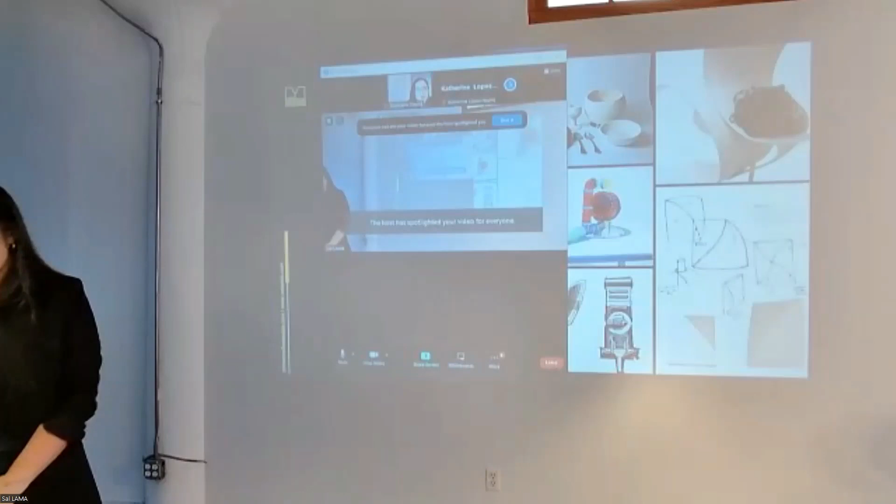Yeah. Oh, it's not? Yes, that's perfect. Okay, yeah, thank you, sorry. No worries, no worries. Bye.

Okay, all right, I'll just click. All right, yeah. So after school, I worked at Converse for a little bit.

I was designing accessories, it was a 2-person team. I started out as an intern, made my way to a full-time position. But I had this itch—I felt like design was supposed to be more.

So I ended up working for Interwoven Design Group, a wearable tech design firm run by an old professor of mine named Rebeccah Pailes-Friedman. But even then I still had this energy—I felt I needed to do something more. I got bored after 6 months; I get bored very easily. It was nothing against Interwoven, I just felt like I needed to do something else.

So I left, gave my 2 weeks' notice, and started taking on different freelance projects. I put a profile on Upwork and some other freelance sites, and basically started taking whatever jobs came our way, for portfolio and, you know, the money.

At some point, Manny did have a full-time job, but he had some flexibility in his schedule. So we decided to join forces, call ourselves Tangent Design, and be on our way to start building a design firm. One year into that, we were 3D printing a lot for clients.

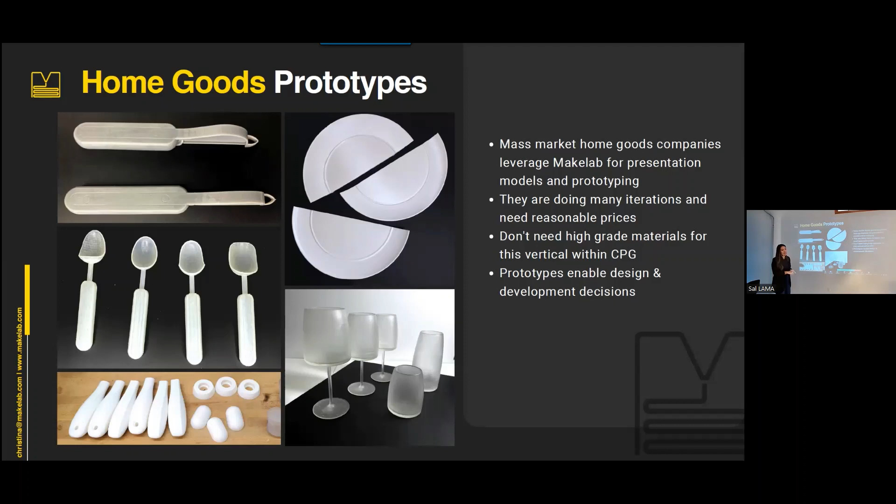What we found is us being able to reliably turn around quality parts in the materials they choose pretty quickly enables them to design faster, so they can kind of parallel projects—they can work on the glasses and something else and the plates all at the same time, because we're taking care of a lot of the heavy lifting with the prototyping.

Another example is packaging. This one honestly took us for a surprise, but it's something that's pretty recurring. Have you guys ever been familiar with paper pulp packaging-ish?

There are quite a few companies that are constantly prototyping and selling their solutions to clients. Part of that sale is that they print with us and we ship them the prototype, sometimes in multiple quantities, so they can try it out in a client meeting and sell the client on the solution without committing to a mold, without committing to all these expenses.

This is really interesting because we do higher quantities for this, but we've also noticed that we print for the same company, and the file names change. So we saw that a lot of these solutions were for Pfizer, Flonase, Whoop—the fitness tracker band with no screen—Billie, Shiseido, and it's just very cool for us to see.

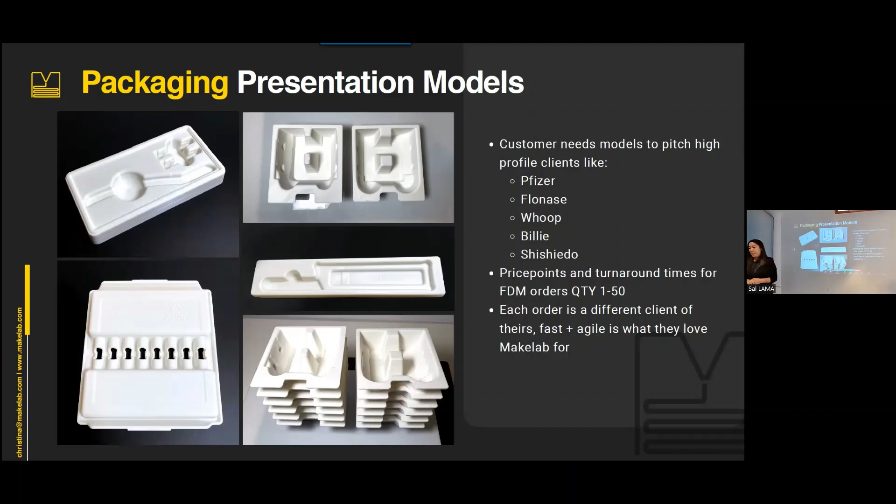And again, they like us for being fast and agile. The last bit is probably the most fun use case, but also the most hectic. Anyone who's been in the fabrication industry, making things for holiday displays or a marketing campaign or a shoot, knows that the creative producers working on that project need everything literally yesterday, and will bring that energy to you. But honestly, it's kind of the most fun projects because it's the most recognizable and you get to see your work out in the world.

So this is an example of this Macy's window that went up last year in 2022, during all the holiday windows. We were printing legitimately squirrels and reindeers and Santa Claus, and a lot more. This was a very, very large project. But what was cool was we printed some of these in parts, and the fabrication studio called Square, they're the ones that finished it, put it together, felted it, and made it perfect for the window.

And for me personally, I grew up in New Jersey, and so when I was younger, I would come to the city every winter season, every holiday season, and my mom would kind of force me to walk a lot to just look at the windows. So it's very full circle for me that we did this project.

And yeah, I didn't want to take up too much time. We don't have that much time, so that's... Oh wait, one last thing.

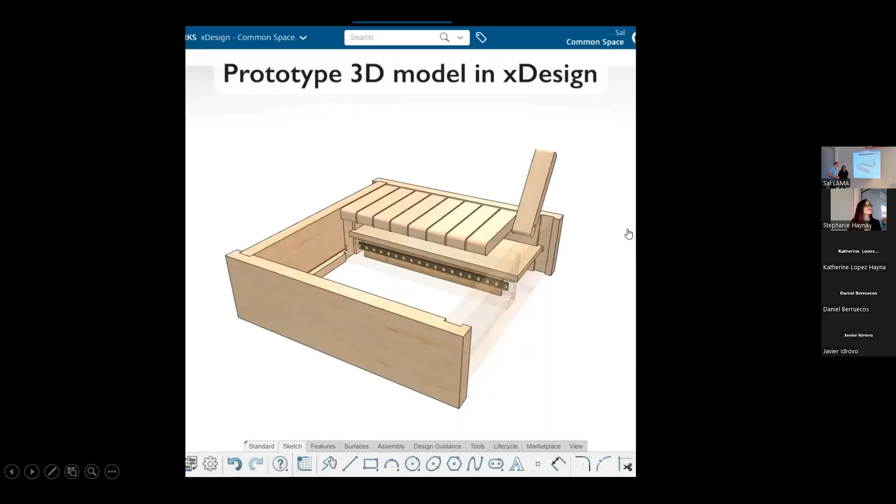That just happened. Yeah, so we've recently - did we miss a slide? Anyway, no, this is it. Okay, we recently started a journey into content creation. Oh, sorry, it's so complicated, come on.

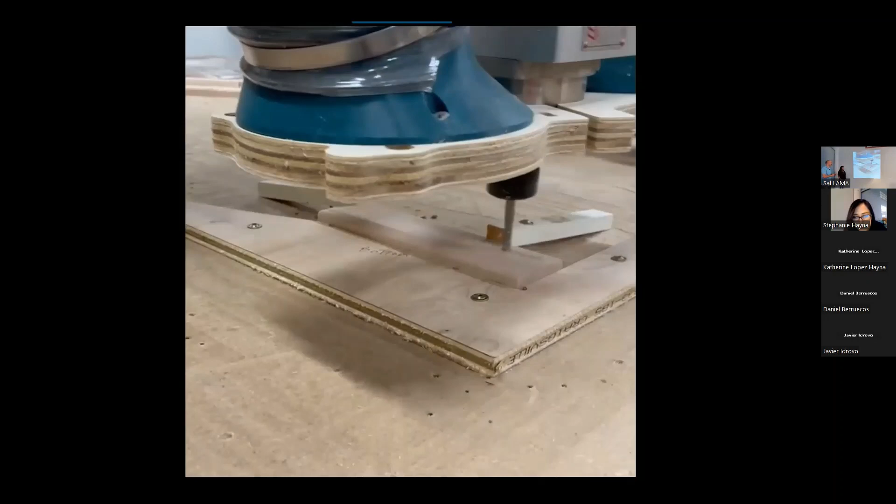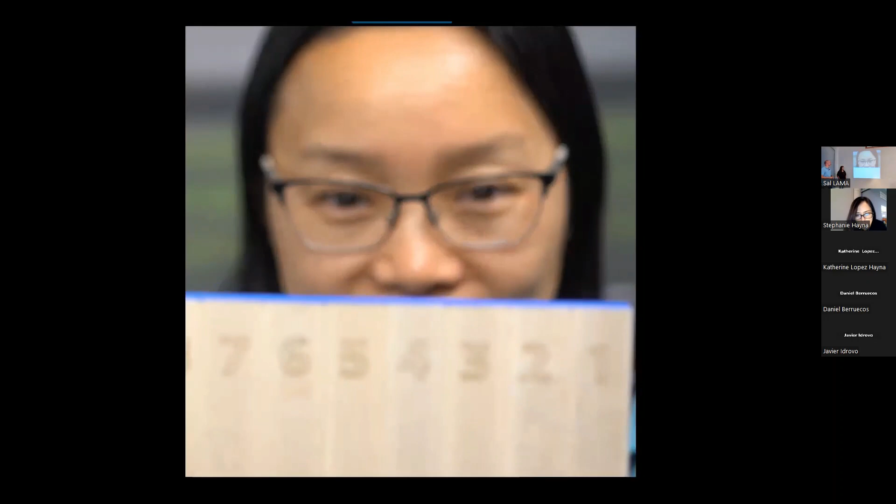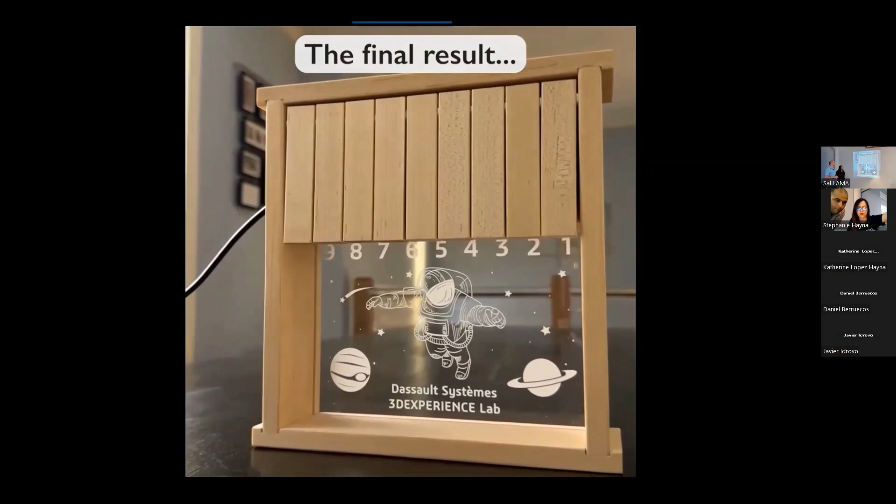We've been avid makers since we could hold a pencil, so it almost seemed natural to actually use the CAD that we design and the skills that we have in our creativity to actually make things. So we started a YouTube channel called OurNextMake, and we build all kinds of projects. This is just an example of something that we built recently - it's actually a Shut the Box game. Has anyone ever played Shut the Box? You need to go get one. It's not going to be as cool as this one though, because it won't have LEDs and laser etched acrylic, but it's a really fun game. You roll the dice, and eventually your goal is to shut the box with all the numbers that are lit up. But again, this is just one example of the type of stuff that we do on our channel.

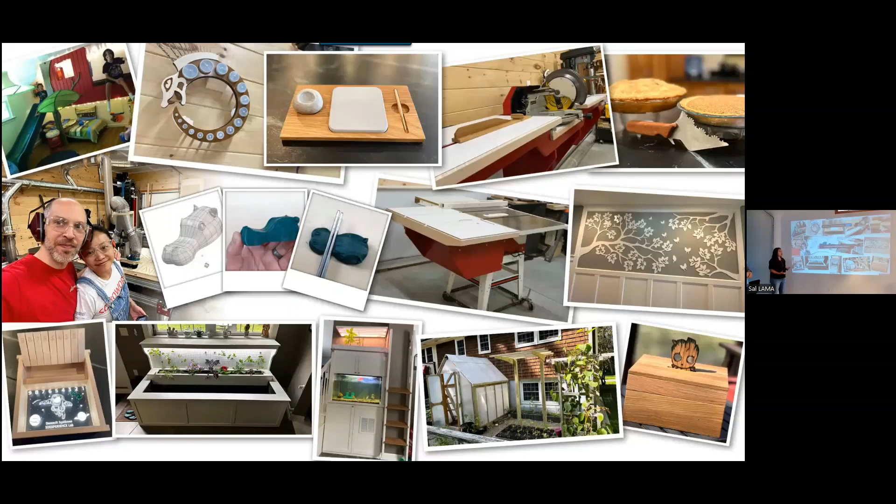We do a lot of different things. The idea is we want to use our software to eat our own dog food, or drink our own champagne, however you want to say it. But in doing so, we found that we could do a lot of stuff like woodworking, 3D printing.

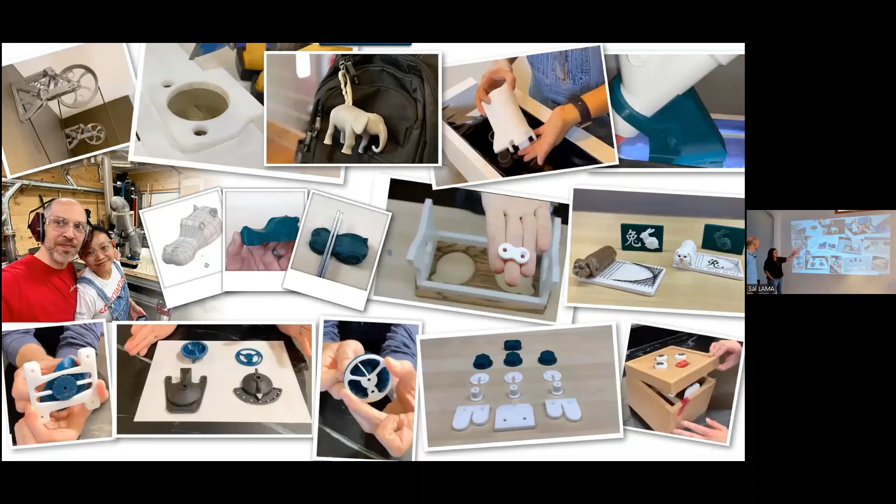You'll hear a bit about things that we've learned. We have not touched everything that you guys have, so we would love to have a conversation. Our projects, some of them have nothing to do with 3D printing.

Some of them are all about it, and most have some element where something needs to be 3D printed. So we want to talk to you about that today. Our goal is to share what we've learned about making something that's going to be 3D printed, and also to learn from all of you, since I'm sure there's expertise in the room we can share amongst ourselves. We want this to be a dialogue as we go through.

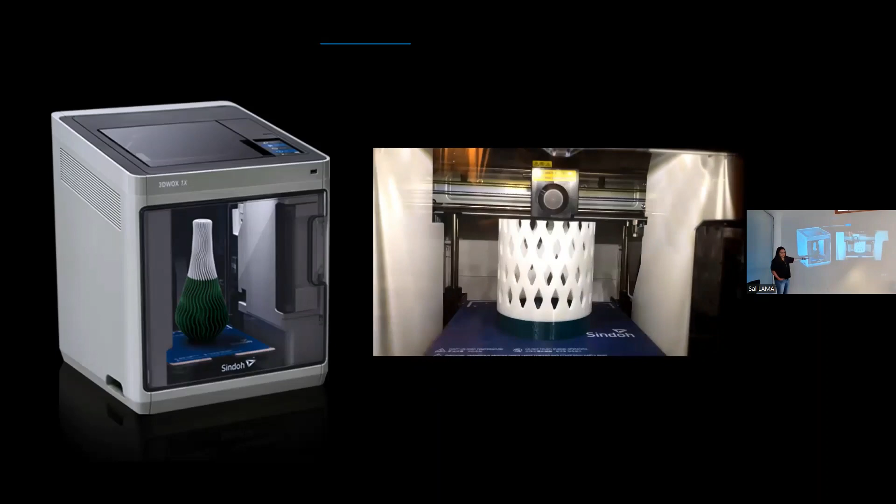One caveat I want to set is on all of these projects we've done, we've strictly been using one particular printer that we have quick access to. We have 2 Sindohs at our house, conveniently, that we can access. So we're using PLA in working with what we do. Understand that when we start telling about the learnings that we have, I'm sure there are solutions in other methods, but that's kind of what I think this conversation is about.

A lot of our stuff is FDM based. If you're doing SLA printing or some other powder or metal printing, that's not within our wheelhouse. But if that's expertise you want to share with the group, we'd love to hear that too.

I think a common question when you start thinking about a part on the screen, you've modeled it in whatever CAD software you use, and you ask yourself, how am I going to print this? There's criteria we try and address: am I trying to design this to be really strong, or do I care about the surface finish? Do I want to minimize how much material I'm using, or do I want to make it easy after it comes off the print bed to have a finished result? And maybe I just needed it really fast. So what are the things I can do to hit one or maybe all of these?

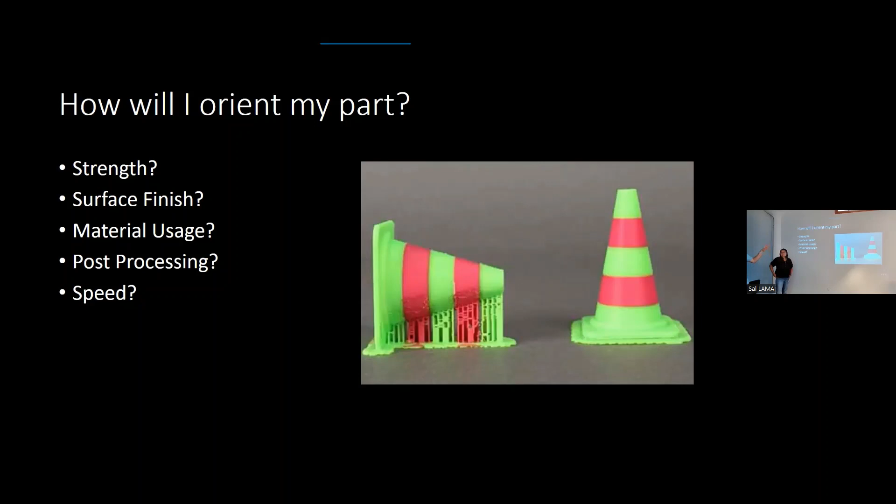Where are the trade-offs? I think the good news is that 3D printed parts can be very strong. For people online, I'll pass this around - this is an example, I'm not going to tell you what it is. I'll ask everyone online to start putting in your comments, and as I pass this around, you can start feeling it. I will say I haven't processed the back, there's a couple sharp little bits, so be careful as you handle it. But again, 3D printing can produce really strong parts, and that's a part that has to be strong.

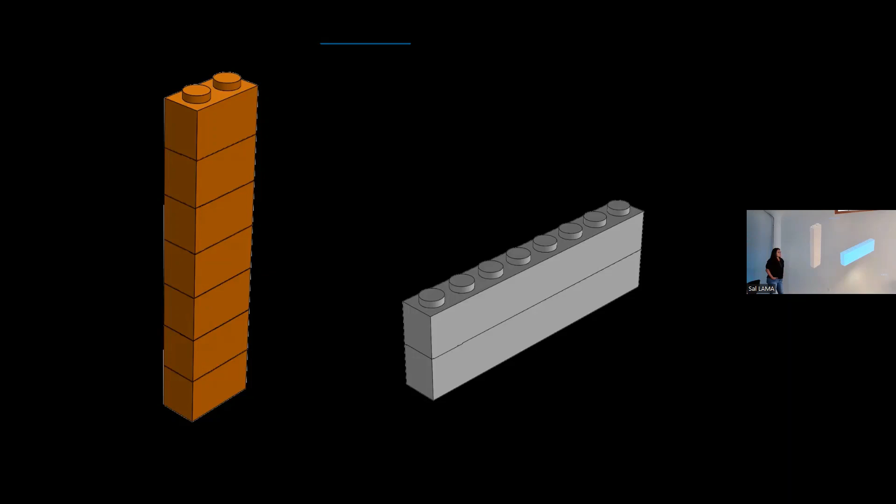I love this example. In FDM, you're laying down a layer of material at a time, and the orientation of your model will dictate its strength in many ways. If you stacked a bunch of Legos up like that, or built the same rough volume with Legos like that, there's going to be different strength characteristics, especially if in the end they're going to be a diving board. If it's held on one end and pushed on the other, clearly the one that's got all the layers going this way is going to break much more easily than the one where the layers are going this way.

So thinking about how your part's going to be used and knowing how the layers are going to stack up can also impact the strength.

Now, this is another example. We built a game. Surely people have played Ring the Hook or Hook the Ring. It's a drinking game, but it's a simple game. There's a hook, a ring on the end of a rope, and you have to try and hook it onto a...

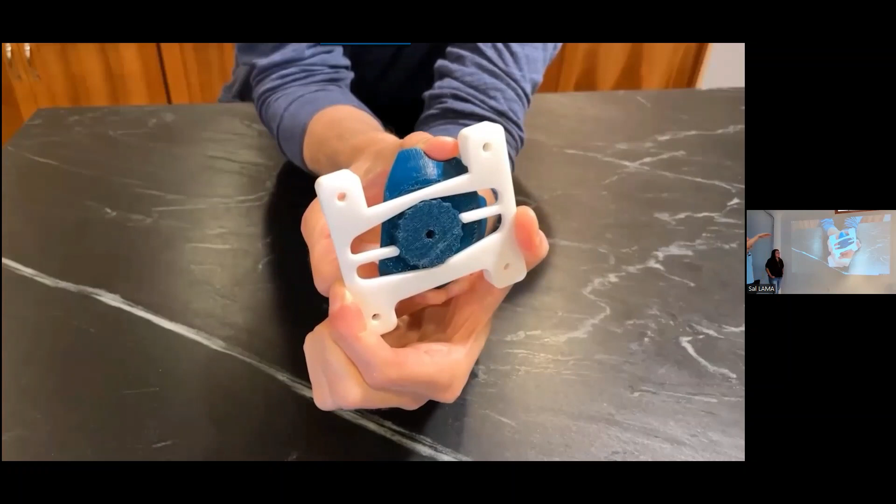Oh, and there's a little mechanism that I tried to design to hold the beam up. I wanted to have this sort of rotating mechanism where I could ratchet it into place, and that would hold the model. Then when I needed to get it out of the way, I'd turn it and it would let the arm down.

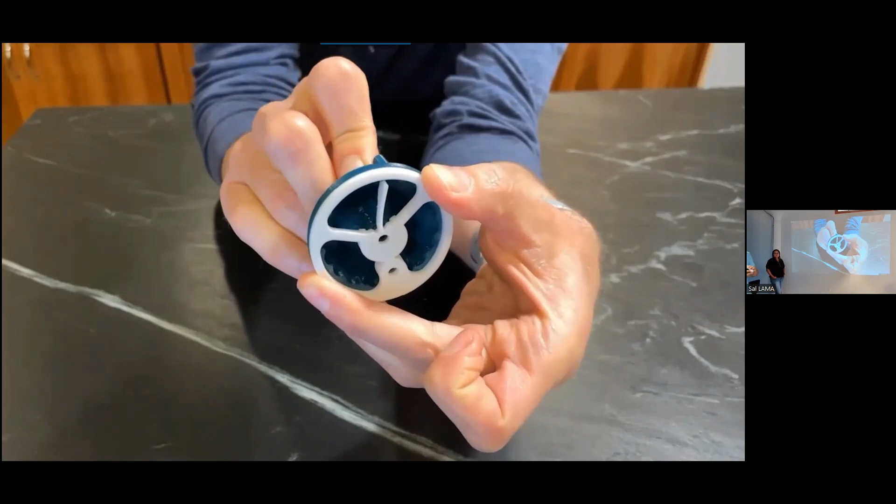I realized that I designed it way too strong. In fact, here's another sample. For those of you in the room, sorry for the folks online, this is going to be really hard to turn. But you can play with that and see just how hard it was to actually turn.

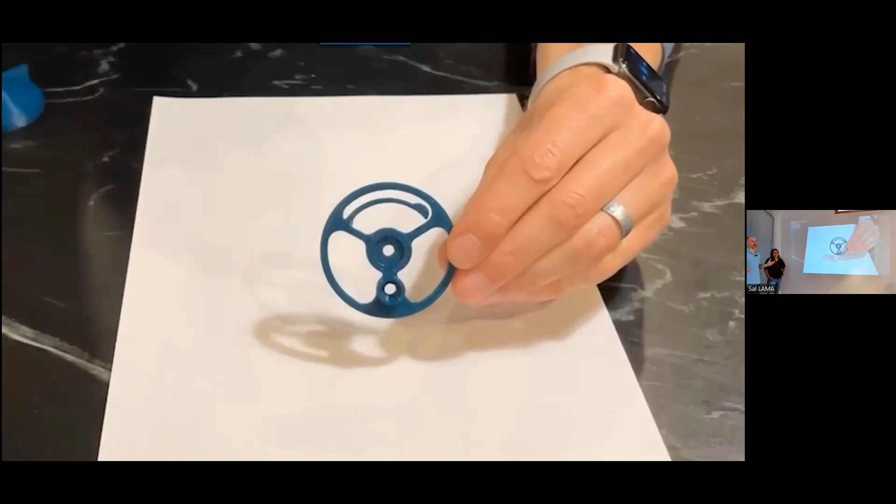So you can certainly design things that are 3D printed that are over-designed. But I went back to the drawing board and I started to modify the design and exploit some of the properties.

The very first one that you just saw in the video was actually where—let me back up, because this is right here. So I brought all of the ratcheting mechanism inbound instead of these big fingers on the outside. And I figured, okay, I could just have one finger that goes click, click, click.

But in this case, it was too fragile, and after just a couple of twists, it broke. So I under-designed it. Again, I figured a nice long beam would be fine, but the material was too stiff and it caused all the force to be way down there at the joint. It didn't have that flexing.

So I went back to sort of the drawing board, if you will, and made this design where it came off at an angle, because now it's just deflecting ever so slightly. And now I've got a part that actually works.

That's one that we can pass around as well. In fact, I took it one step further, because only having one of them created sort of this asymmetric feel. It felt one way when you turn clockwise and a different way when you turn counterclockwise, because of the compression and the tension. So I did this two-finger design and created a much more balanced feel.

But again, you can create very cool functional parts with 3D printing, and they can absolutely be strong.

So where is that weird part that I sent around? Is it still making its way around? Okay, I won't rush it. Chinloo, you got one other example here, right?

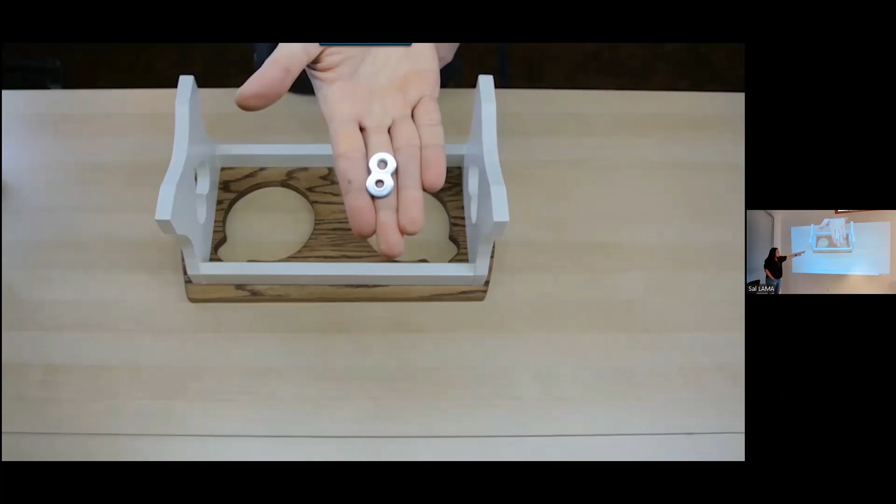Yeah, so here's an example where we utilize 3D printing to do a very simple function, which is attach the surface of this dog food station onto the base. Traditionally, you have these little number-8-shaped clips that you can screw one end to the base and then one end to the underside of the table.

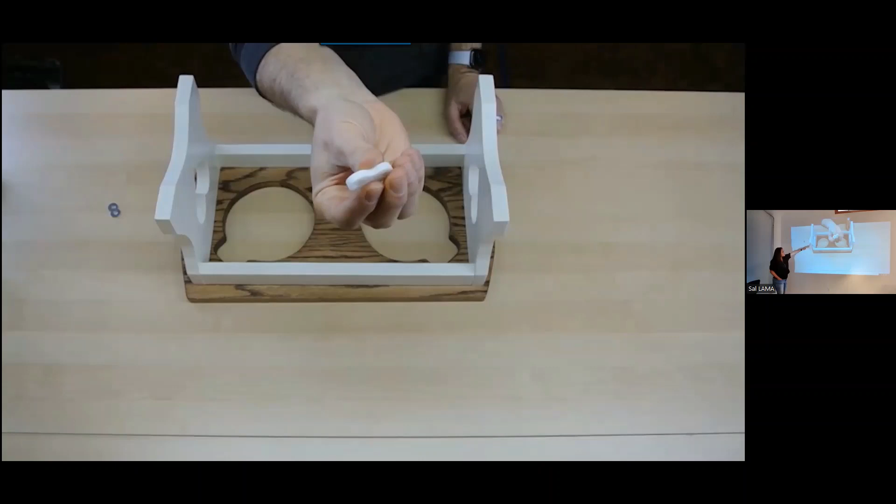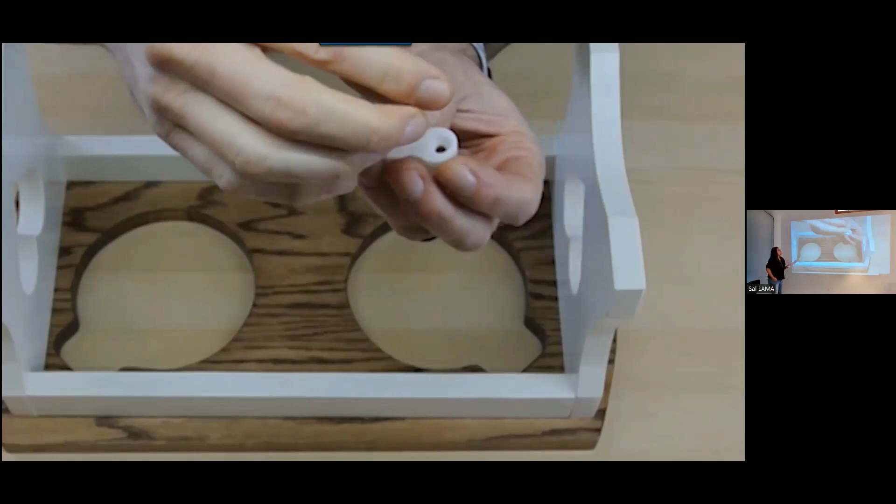But that's kind of overkill for something like this. So what we designed was this little version that is 3D printed, and it gave us the opportunity to countersink and create that kind of finish that we wanted. Here you can see Sal showing that you can flip it, and it's designed so that now you can install it hidden into the hole part of the dog tray. So it's that customizability that really helps, and it's strong enough with the 3D print.

Yeah, and that's an important part—there's strong and strong enough, right? It doesn't have to support like a 200-pound dining room table, whereas the metal clips might be used for something like that. But of course, for a dog food station, just a very simple 3D printed plastic part can do the job.

So that's a bit about strength. Where is that part? Did it come back? Who's got the guesses? Did the people online? Oh, Manny's got a guess. Manny, what's your guess? What is it? Rock climbing? You got it.

You're supposed to lead them on. Sorry, no, that can't possibly be it. Did anyone online guess that?

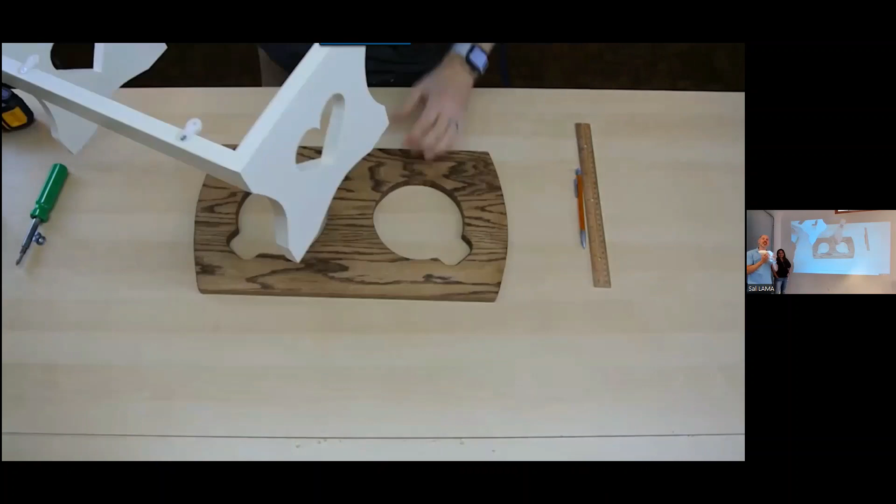Good guess, so yes Manny, you nailed it. This is a rock climbing hold. We don't often do this on OurNextMake, I tend to keep everything hush hush until we air the episodes, but this is something you'll see in a future episode. It's a rock climbing hold, and I tried to design it so it had a lot of variability. I could do a two-handed grip like this, or a finger grip like this up top. And it's going to be bolted, so it's got to hold a couple hundred pounds worth of me and others who might try it out. But it's exciting to play with this.

We'll talk more about this in a minute. We use SOLIDWORKS for Makers. SOLIDWORKS for Makers isn't just the SOLIDWORKS many of you know, it also comes with our cloud applications, XDesign and XShape. This model was made with XShape, which is a subdivisional modeler. You can push and pull the geometry, so it's really easy to create complex shapes like this with the software that comes with SOLIDWORKS. We'll show you some more examples of that too.

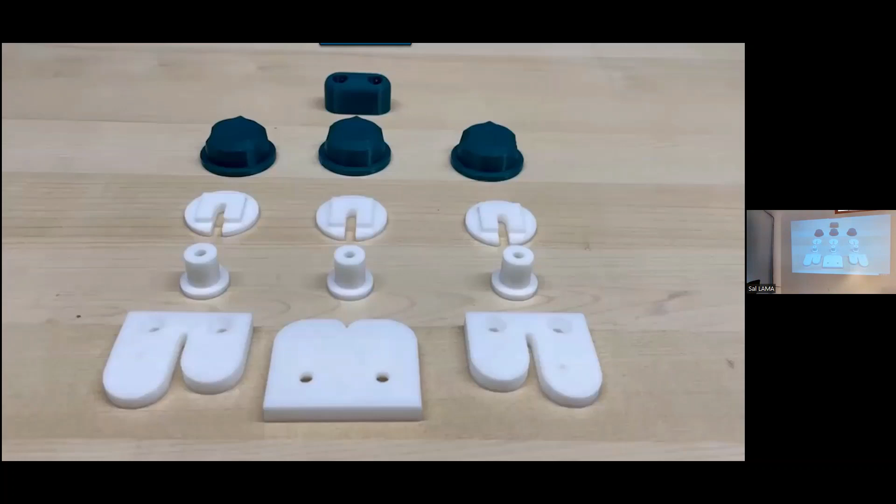You want to do the surface finish first? Sure, yeah, okay, that's you. So I thought this is a video. Is this not a video? Sorry.

In this example, we made this monster keepsake box for one of our nieces. What we were noticing was that, depending on how we set the piece, it's kind of hard to see here, but if you can see the finish on the teeth of this monster, there's a slight curve to it. Because of the way we printed, you could actually see the striation. It's really critical to think about, for us it wasn't a huge deal since this is a little toy chest and the finish isn't a big issue, but for consideration of what you think about when designing your 3D print and which way to orient it, you have to understand that the more shallow the curve, each layer moves back more, and you get that stepping effect.

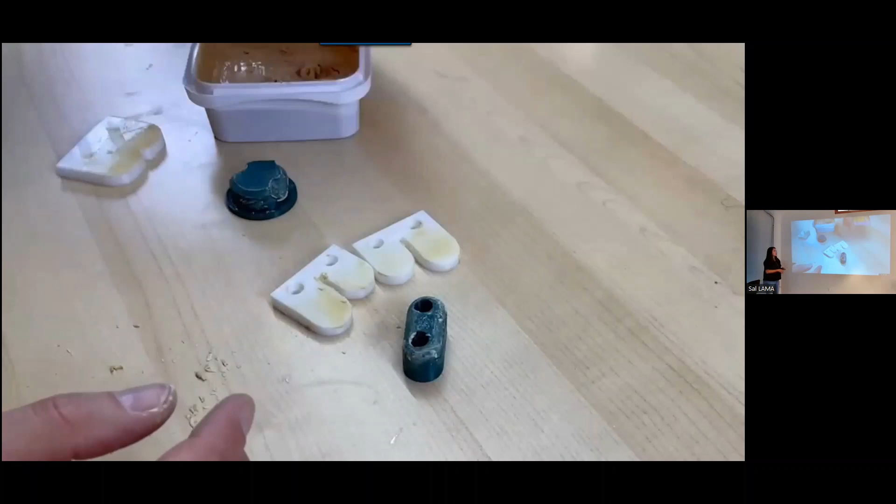In this case, we quickly threw together some wood filler we had available, sanded it, and applied it. I'm sure there are plenty of other solutions. We've tried acetone in the past, all those different ways. Finish was important in certain designs, but in this particular case I think we just made a compromise and made it work.

That's the other thing I want to ask the group in a moment, but here we experimented. Normally we'd do spray filler and sand it down, spray filler and sand it down again. We figured let's try wood filler, let's see what happens. We had it on hand. It kind of works, but it's still an experiment in my mind, and I'm still concerned about its longevity and how brittle it'll be. It'll dry out, so odds are it's not a good thing for a child's toy gift center.

We did apply, what you're seeing here is acrylic paint over it, so there's some layer of protection, and then we used Mod Podge afterwards. There are different ways to just kind of capture it, but Sal has a point - people use Bondo, and there are things meant to just seal and set in and be good. While we were experimenting, wood filler wasn't that bad, it dries fast in the hands.

No, we haven't, that's a great idea. Yeah, it's like plaster, so that's a great idea. Online, the woman in the audience said try to use gesso. Is that gesso? Yeah, as a filler? Yeah, and you can get it. Oh yeah, I've seen them before.

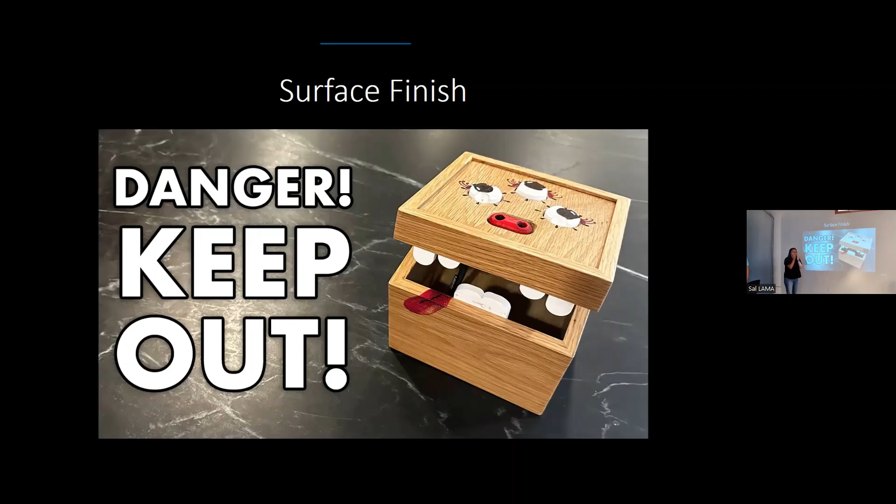So inside SolidWorks, what we didn't do... what are you doing there, Art? Troublemaker, we got troublemakers in the audience.

So this is inside SolidWorks. What we didn't do ahead of time, which we could have been smarter about, was check under the file menu. There's Print 3D, built straight into SolidWorks. What's cool is you can pull from a library of printers - we have a Sindoh, so that's on my list. Under managed favorites there's a long list, every brand under the sun, so if you have a specific printer you can find it here.

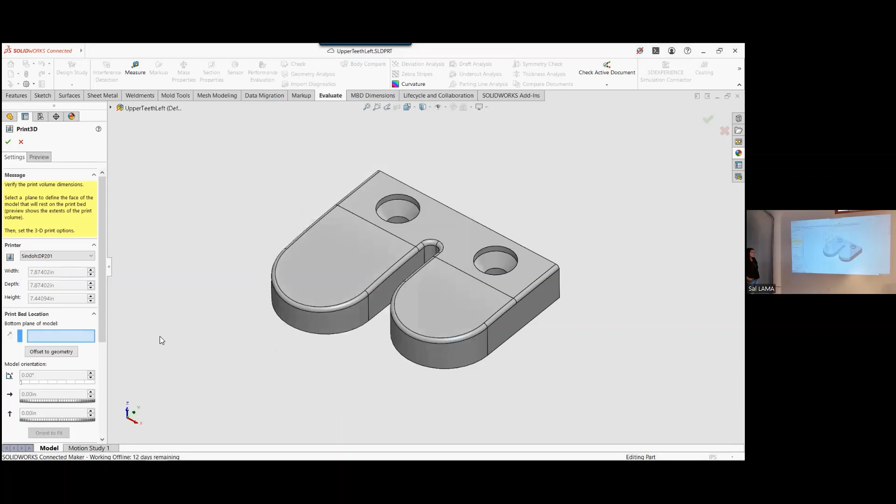When you make your selections like this, it'll put it inside an actual preview of the volume of your printer, so you can see does it fit, can I fit a couple more.

The other thing I really like about it is under preview, I can show the striation lines and dial in the thickness of my layer. For Sindoh, the default is 0.2 millimeters, so I'll just type 0.2mm. It was already at that, but you can see the black and white stripes, which shows me how many layers it'll take to get this part.

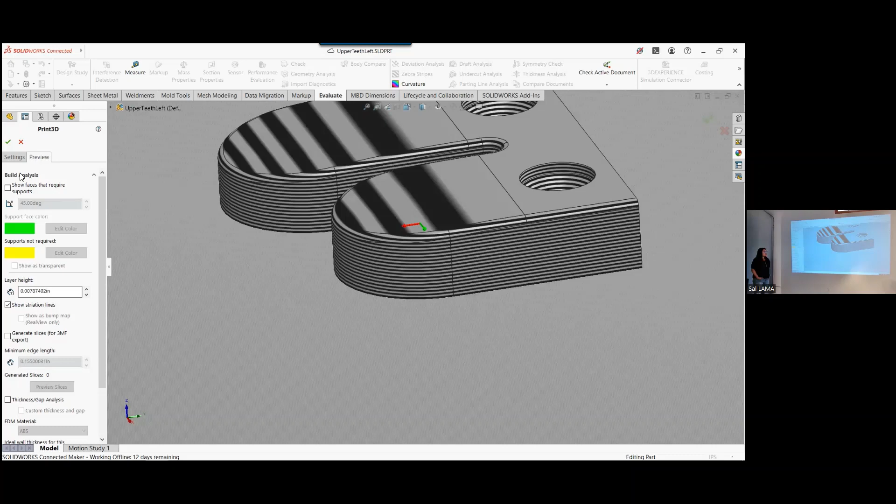Seeing these really wide bands of black and white should have been an indicator that I'd see this awful step effect in my 3D print. Had I considered rotating it and printing it straight up, those curves would have been much better. That's the benefit - it saves you time to preview before committing time and material. Something like this would have been a better orientation, though at the top you might have had a little flat spot to deal with, but that probably would have been a much better result.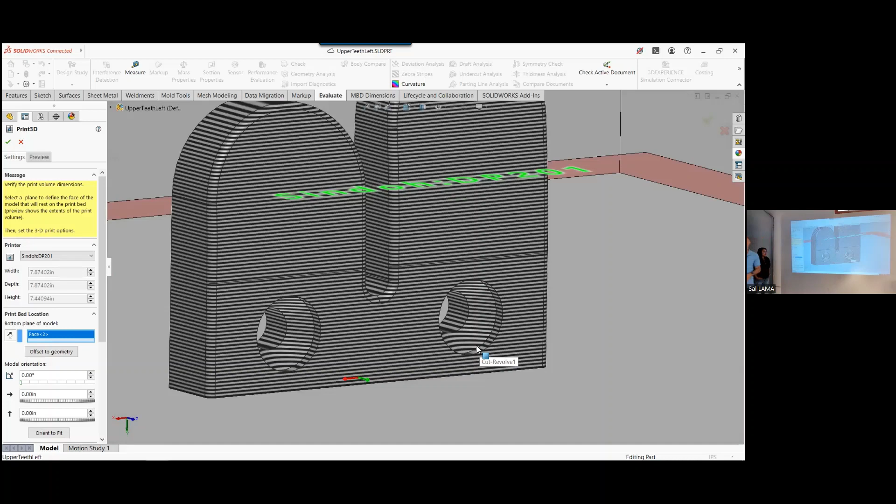But then you have to deal with, am I having support material in my screw holes - we'll talk about that. And time: orienting it vertically probably would have taken longer versus what we did. So we made a decision, but if this is important and you need to follow those rules, definitely make those decisions.

Does anyone else want to share other stories? Is there any other tip that anyone would share with the audience online as well? Stephanie, is there anything where you've done a great job and say, oh, I use this technique and it works flawlessly?

I've used an acetone bath - evaporate it in the container and then sample it. Yep, this is what we did with the card holder. Anyway, we'll show you kind of what we did.

Was it PLA or ABS? Yes, PLA. I've used sandpaper too, good old elbow grease and sandpaper - invest in sandpaper because we use so much.

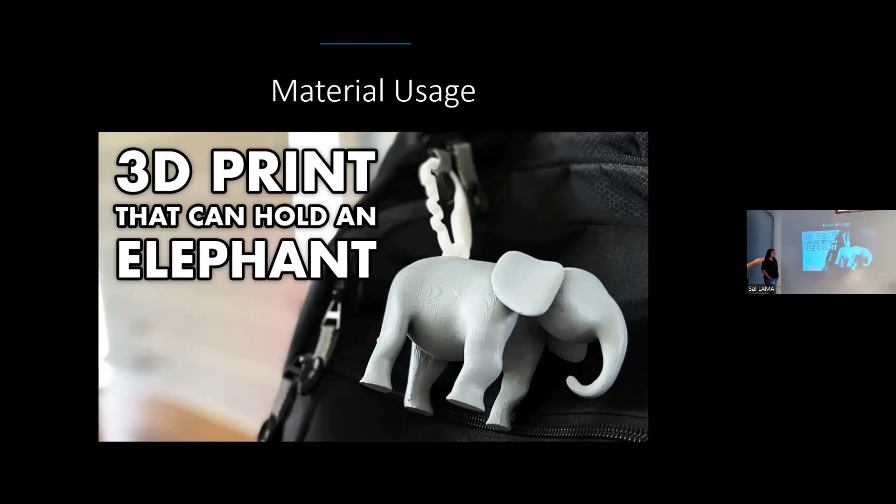Cool, okay. Now we want to talk about whether you're designing to try and minimize how much material you use. Here's an example: we built this little elephant clip to go on our nephew's backpack to go to school.

Elephant's his favorite animal. Is this me? I don't remember you, yes.

Okay, so let me jump back into SolidWorks really fast. One of the other things - that was the video too, I don't know if you want to play it. That was a video? Okay, this live action is better than video. So there's our elephant.

We actually, Chinloo modeled this in SolidWorks Apps for Kids. Can we talk about that? Yeah, so if you guys aren't familiar with it, there's a free online app called SolidWorks Apps for Kids - swappsforkids.com, and it's completely free.

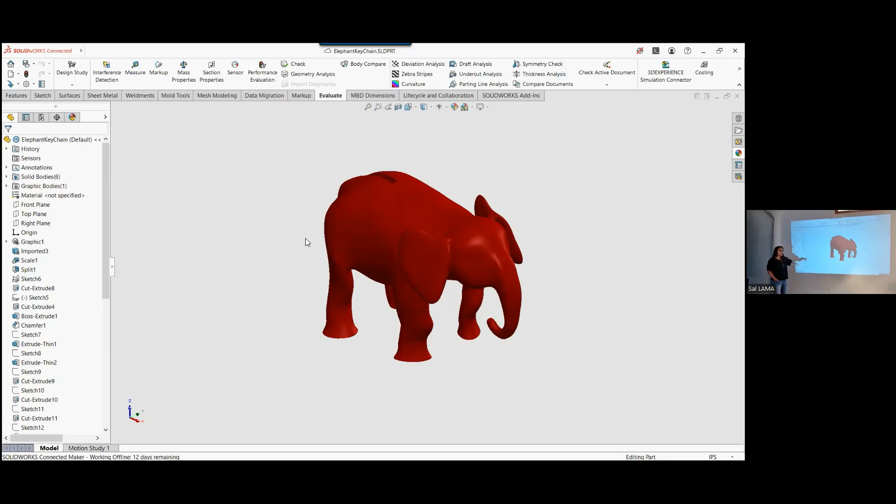Create an account and you can actually go in, and it's all subdivision modeling, so it's like a baby version of X-Shape that we were talking about. So there I was just kind of having fun and pulling together the shape very quickly, within maybe 20 minutes or so, maybe even less than that.

And Sal got inspired and he ported it into SolidWorks, so you can bring it in as an STL. There's a whole separate presentation we won't go into, but from a high level, the output from Apps for Kids is an STL, which you would normally print. But SolidWorks can take in STLs, treat it as a solid, and then we slice and dice it, and you can do more stuff. So for the SolidWorks users in the group, you can see all the features I added afterwards to build this out.

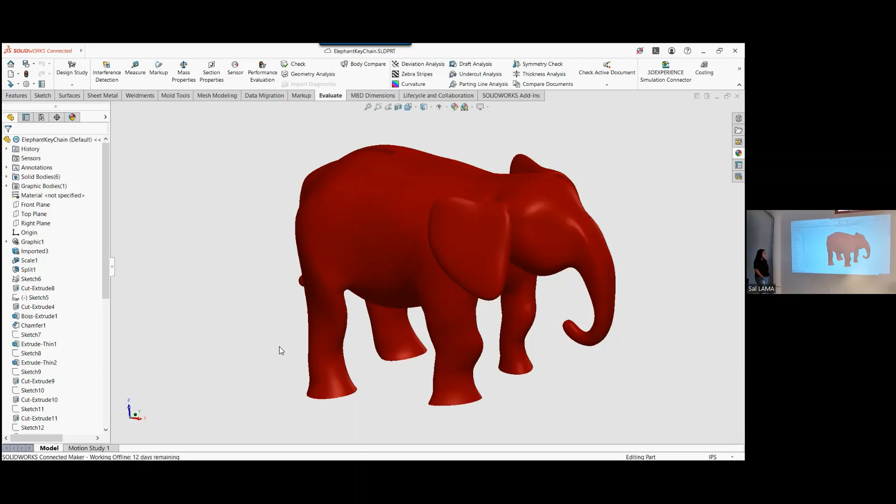What I want to focus on today in the spirit of 3D printing is, if we go back to that print 3D preview, one of the ways to minimize how much material you're using is to think about how do I minimize the supports that I need. You could change your wall thickness and infill and all that other stuff, which is good to consider, but it's also important to think about how to get rid of the supports or minimize them, because that's technically wasted material.

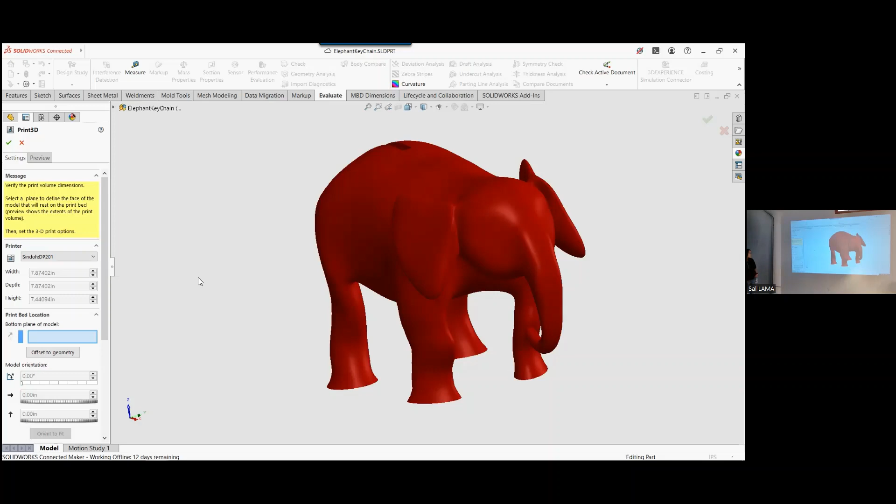So if I were to print this elephant the way you might think it should be printed, and I go back over here to preview and check this box that says show faces that require supports, you can see all this green, hopefully you can see that, all the green underbelly and the face and the neck, everything that needs support material up from the bottom. It's going to be a massive amount of material that's just throwaway.

So when you're printing something like this, you can say, hey, is there another way to print it? Now printing it upside down or sideways isn't really going to help it. In fact, it'll make the important surfaces ugly, because when support touches the surface you care about, it's more work to deal with.

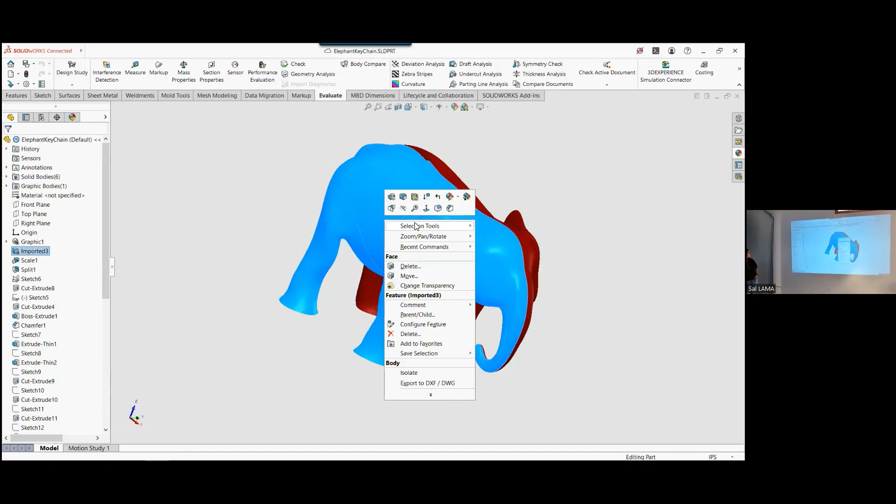So for us, what we were going to do was split this thing in half. I'm going to go ahead and hide this thing. So I split it in half, and in fact that gave me the opportunity to build this little recess right here, where we could hook our carabiner.

So in fact, if we go back to here, you notice there was another little 3D printed element that we nested in there, and we could then hook it to his backpack.

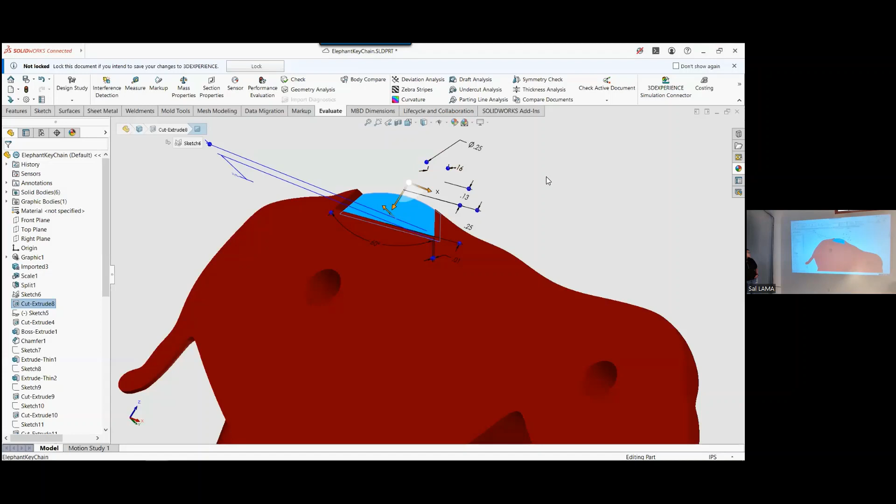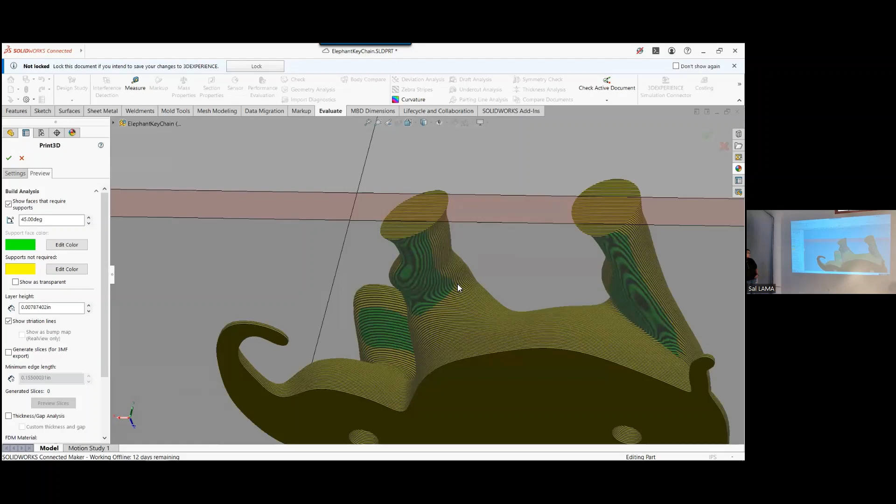So by splitting this in half, now we do that same file 3D print preview, and we come back to here, and now we choose this face, because I forgot to choose it here. We choose this face as we're laying it down on the bed, and we go back to preview, and we can sneak up in here, and we say there still needs support, under those legs it needs support. That's hard to see, isn't it? And a little bit under the ears, but it's much less.

And the other thing that we've accomplished is we've given ourselves a really large flat surface to adhere to that print bed, and we could potentially say, I don't want a raft, because there's enough surface material on there to actually print without a raft. So these are the types of things you can think about when you're trying to minimize, if it's important to you, the amount of material that you use.

So, do you want to play the video? Yeah, we'll do that real fast. How are we doing for time, Stephanie? We're good? Okay, all right. So yeah, this is the quick run through.

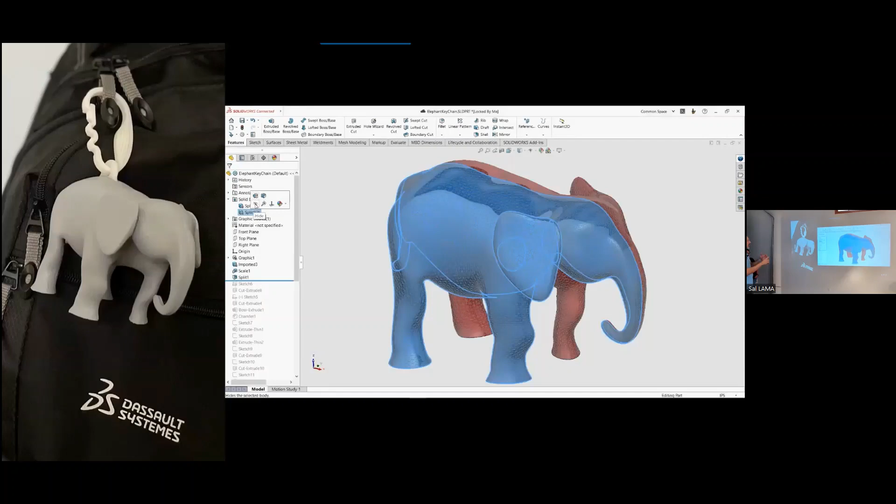So here, again, in SOLIDWORKS, for those interested in how you go from mesh to other solid features, I import it, I turn it into a solid, I scaled it to get it to the right size, because it comes out of Apps for Kids as whatever size. So you can scale it in SOLIDWORKS, and then you go and add all your features. So I cut the recess, cut those tapers, locating holes, because I 3D printed little pins that will help me locate the halves.

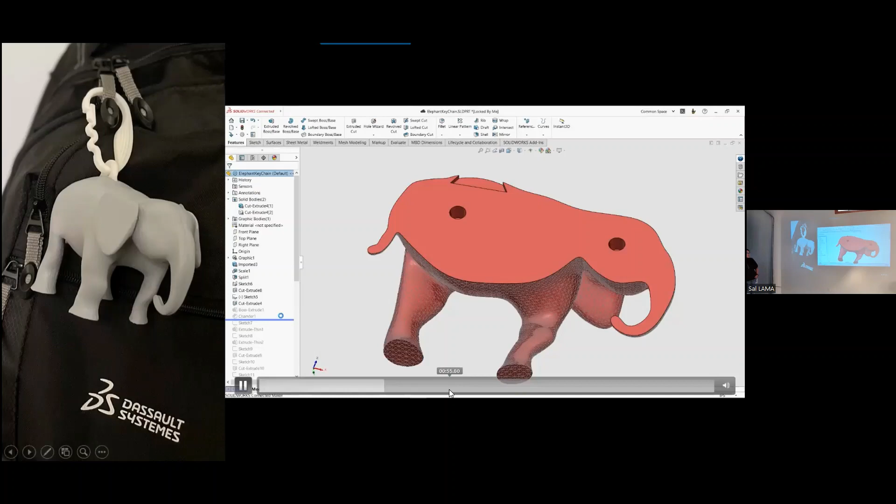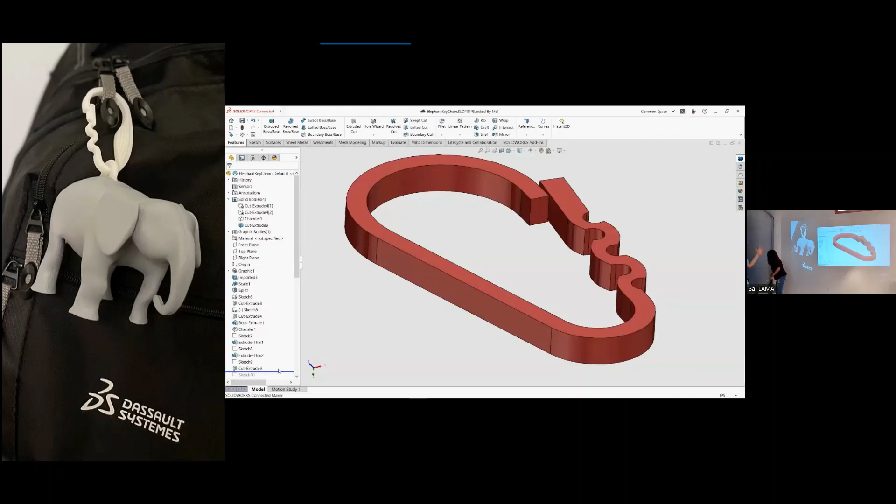Here's another thing I love about 3D printing: you can print a small subset of your design to make sure the parts that have to fit actually fit before you print the entire thing. And here we're printing the carabiner.

That's the other cool thing: 3D prints can have flexibility. You can design in flexibility. So I print it in the outbound position, and then I can bend it into the right location. You can see here I'm doing that very thing, exploiting the fact that it's a little bit flexible, bending it right around. Because it's printed outbound, it has a natural compression force to hold it in place.

I'll repeat the question for the audience: when you're designing something like that where there's flex involved, how do you figure out how to design it for that flex?

This particular case, it was a lot of intuition and a little bit of trial. I knew I had to be at least outbound of that hook. I didn't assume I needed to be a mile away, so I went a little bit away, and then I experimented. It took me a couple of prints to change the thickness of that, to change the spacing of the curves.

The unfortunate thing is SOLIDWORKS for Makers doesn't have simulation in it. If I had proper SOLIDWORKS, I would absolutely have done a little bit of simulation to see the differences, but a quick experiment is what I did, just to go for the feel there.

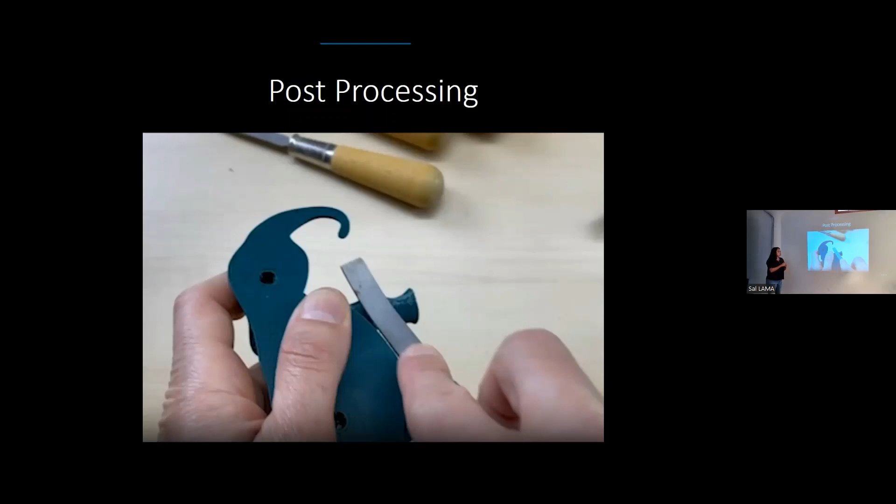Let me talk a bit about post-processing. As Sal pointed out, he was able to minimize support, but now we know a better way to reduce the support structure. Without all that scaffolding, when we did have it, it was always a struggle to go back and sand. We had files with all the different sanding grits, so we worked a lot with that. It's really important for us to minimize that since we're trying to turn these things out every week as an episode.

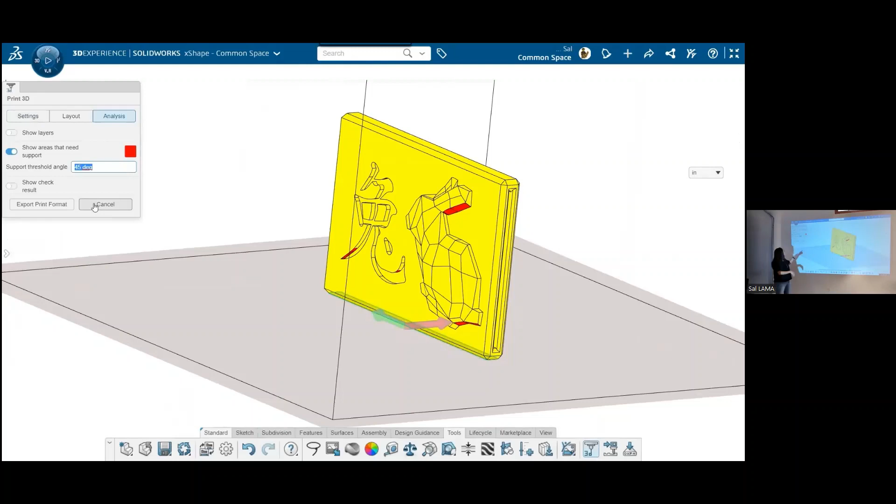One of the things you can do to decide where you need support or not: here in this example we have a little card holder we designed, with a little bunny rabbit. You can see a few overhangs using draft analysis in our cloud products, xDesign and xShape. You can hone in on the acceptable angle you want to test, and see the offending surfaces.

You can go in and adjust accordingly to reduce that angle so you won't need support there. That's a quick way to sanity check, especially in areas where it's not critical to maintain a certain angle. This draft analysis feature is in both SOLIDWORKS and the cloud products we mentioned, which can run online.

run online. I love you, Milo. Thank you for coming over. You're like my #1 fan.

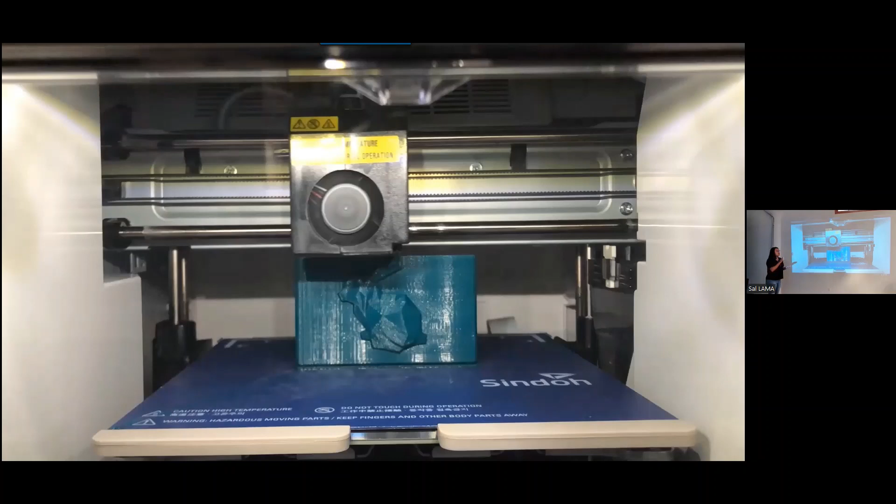You can access it both in xShape, which is that subdivision modeling software we were talking about, as well as xDesign, which is like a parametric cloud-based software.

Was there more to talk about this? We can hand this out so people can see. Yeah, I just passed that around. Okay, yeah.

So the other things, your layer thickness is going to be a big contributor. If you make your layers extremely thin, you're going to end up with more time to print. Same thing with infill—if you want to print it completely solid versus 20% infill, it's going to have a big difference on the amount of time it takes.

But generally speaking, I think this is true for all types of printing, whether it's SLA or FDM or whatever: the taller your object is, the longer it's going to take. If you can lay it down flat, it's going to print much faster than if you're raising it quite tall, because the taller it gets, those layers really start to add up.

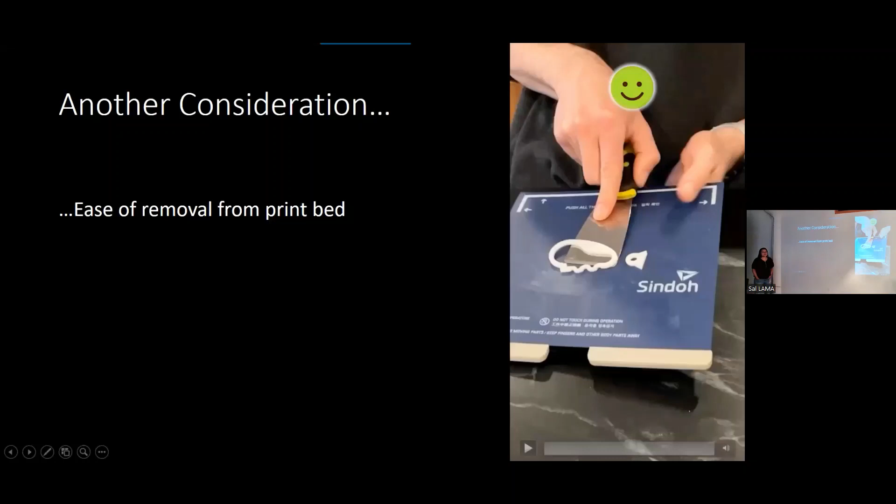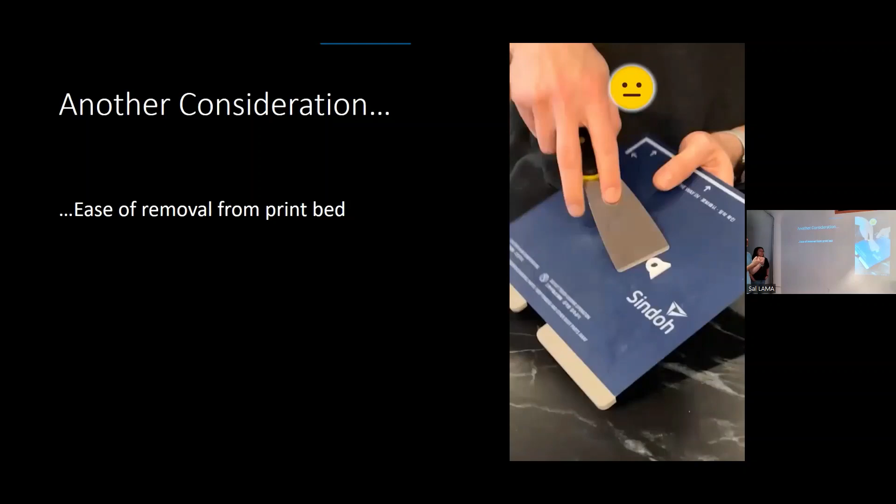So here's another thing that we kind of learned. This is not as sophisticated as all the tips you just said, but this is comic relief. How do you actually remove the print from the print bed? So Sindoh has a flexible print bed, and more often than not, I can flex the bed and get it either to pop off completely or to get my spatula under it. But sometimes I just can't get it off.

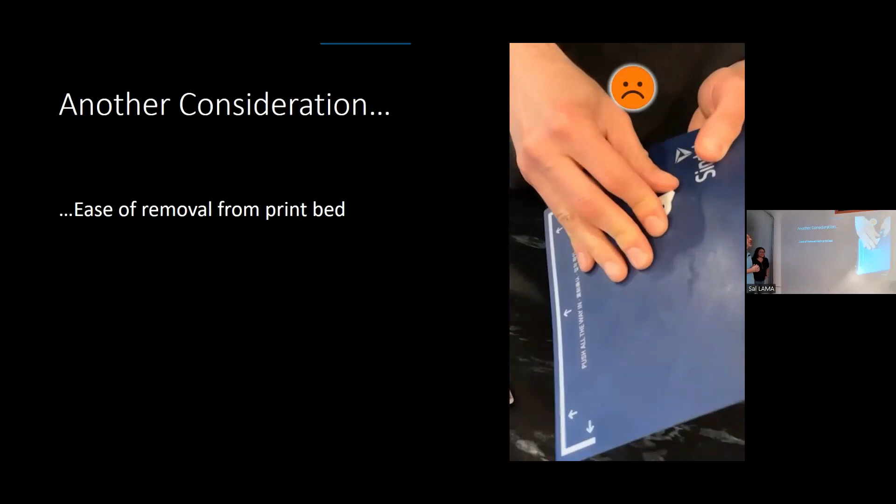So wait for it, this is the best part. Ready? Wait. Here it is. Wait. And I finally get it off. And then I go across it.

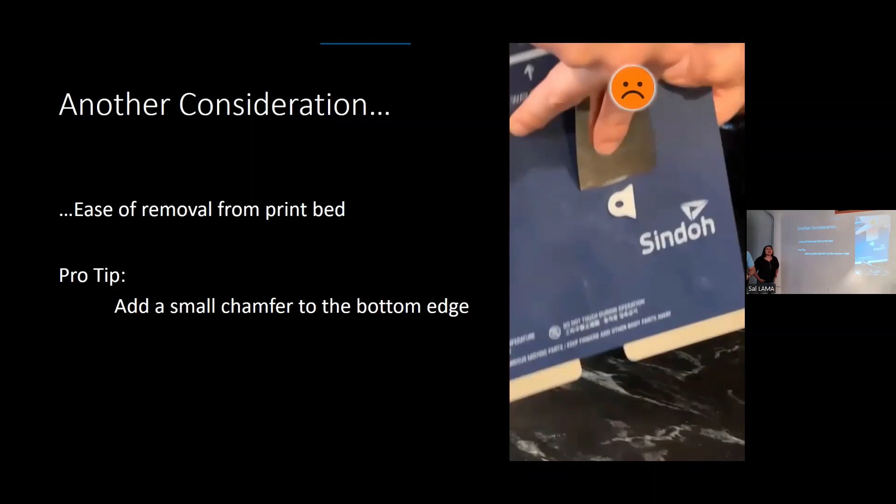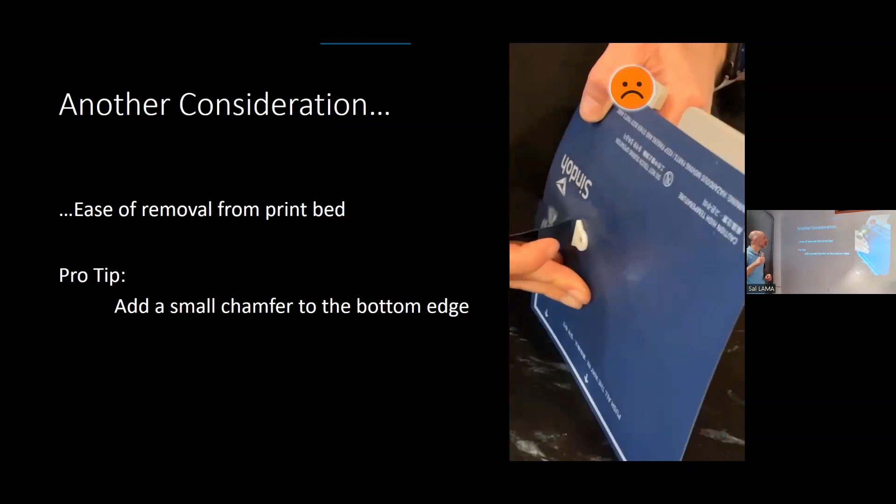Pull the blade down, put it back on and use that. Easy peasy. So you dull the edge of a razor blade and grind the corner, so you're not damaging your build plate, and that'll come right under since it's thinner than that spatula. That's great because then you don't have to do this. But if your model does allow for it, you could also chamfer that bottom edge so you at least have something to get under, to bite. Great tips there.

In general, we love designing all kinds of things, but we certainly love to work with 3D printing. We showed you in the beginning that it's great for— is that a video? I don't know what it is, so I'm playing it. Just keep talking. It's of course great for prototyping your ideas.

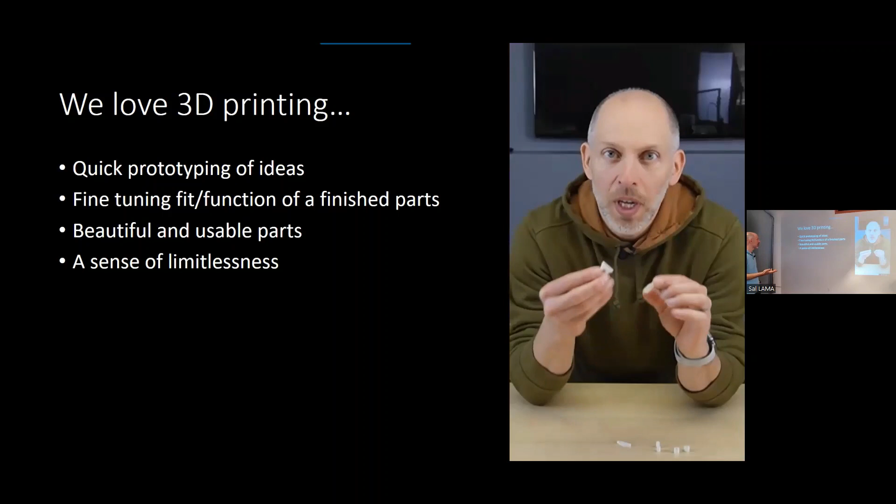I think that's why it was invented. But I also like this idea that you can fine tune the fit. I talked about this earlier: print a subset of it, fine tune the print. I have another example here, and I'll pass it around.

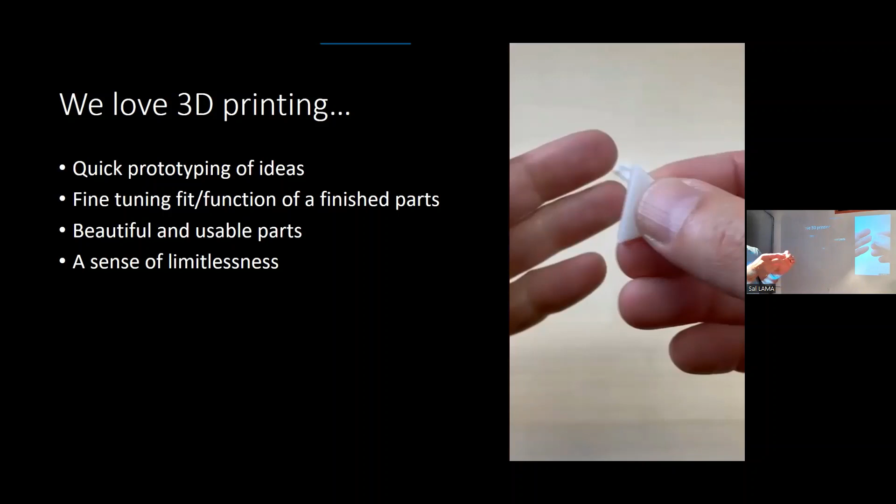Hopefully this is good. I created this little dovetail sliding mechanism, and again, it was meant to be part of this bigger contraption, which I'll show you in a second. But instead of printing the entire thing just to figure out what offsets I should have on my dovetails, I printed a couple of samples, and this one was a little too tight for my taste. So that's a great way of just cutting away your CAD model and getting rid of most of it, then printing a couple real quick subsets to fine tune those fits.

Let me just finish off the rest of the bullet list. Basically, you guys all know this, most of you are 3D printers, they do make beautiful parts. So if you design it well and it comes out the way you want, that is the thing, the deliverable, you don't have to use it to make anything else. Because of that, it just makes us feel like we could do anything. You don't have to worry about traditional molding processes, ways that you can properly eject it from a mold. You can basically design whatever you want and it will work.

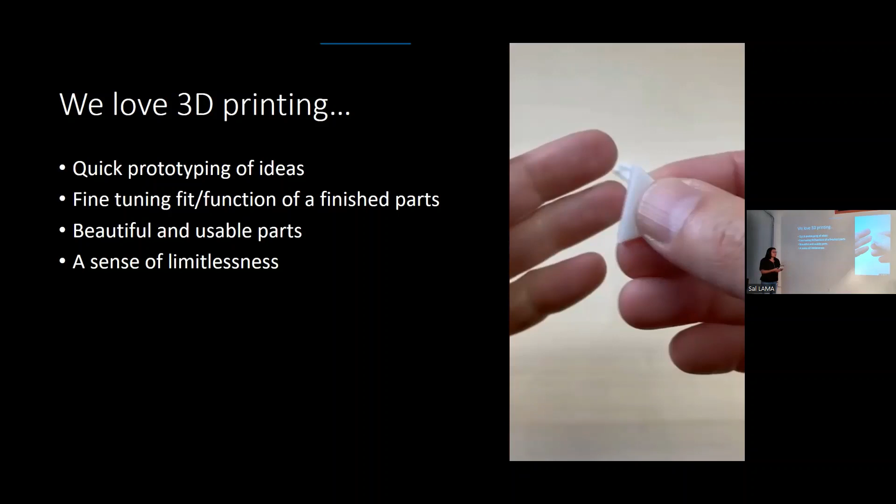So, for example— no, wrong thing. What I have in my hand is actually one of our projects from early in the year, for Chinese New Year, or sorry, Lunar New Year.

We always give money out, we have lots of nieces and kids and everyone. So instead of the traditional red pocket envelopes, we decided to make 3D printed gifts. We were giving out a lot of gift cards, so we thought we'd do these little neat things. I went into xShape and started modeling.

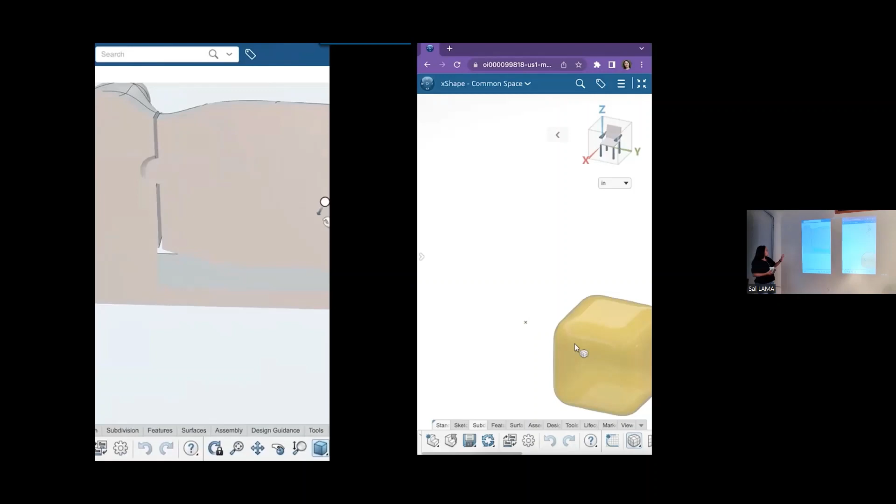What was great about 3D printing is you could actually design the hinge mechanism right into it and print it all at the same time. These little things can actually move, it's like a little locking mechanism.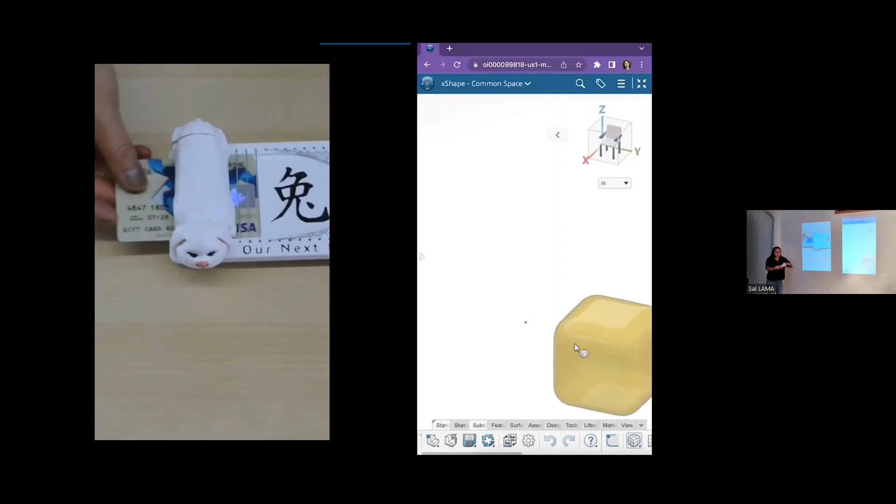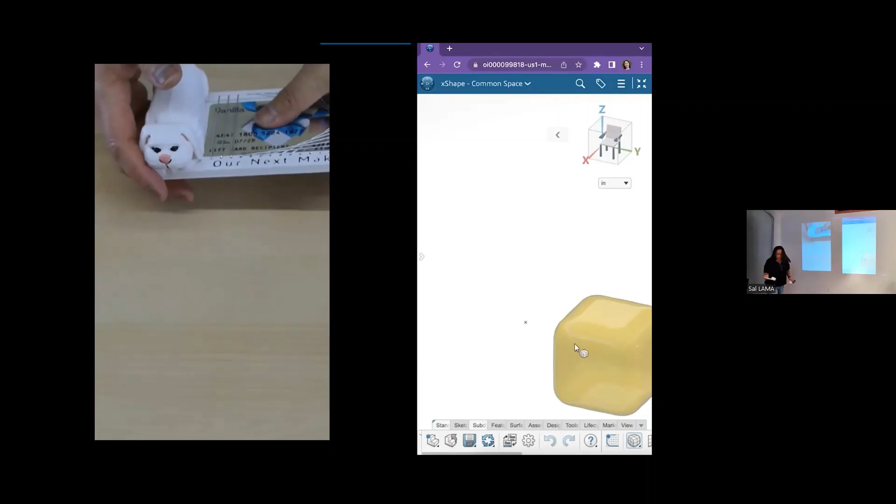So I'll pass this around. It allows you to push the card in, lock it on its side, and then the card doesn't fall out anymore. I shook it too hard. You can do that, take two. But it's not supposed to. You want to pass that and comment on this other video? Here you go.

We were experimenting with just the finish, so you can see one has the Mod Podge treatment and one doesn't. And I did low poly on the whole thing.

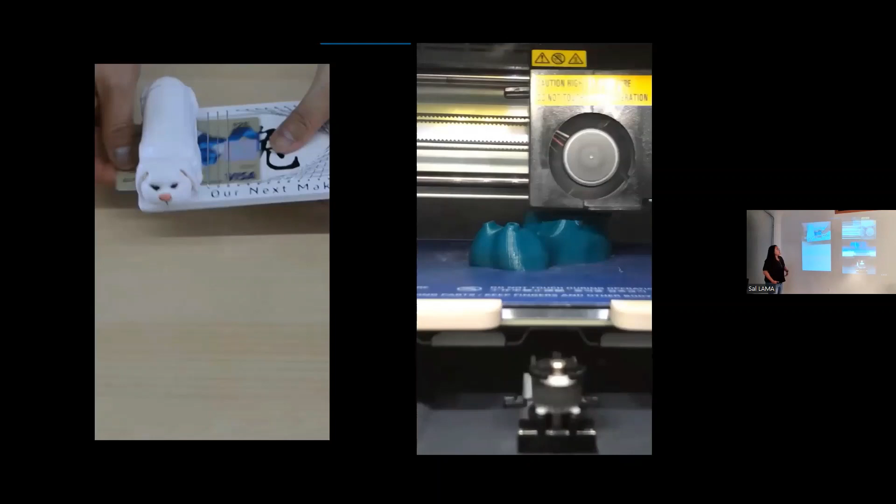What I'm doing here too was like a one-day build. I was having fun with xShape and just making a little hippopotamus. There was no way, as you see this being very quickly modeled, that you could get this out of any kind of mold, because there are so many overhangs, undercuts, and whatnot. 3D printing was great, and there was absolutely no support structures necessary, so it really worked out well.

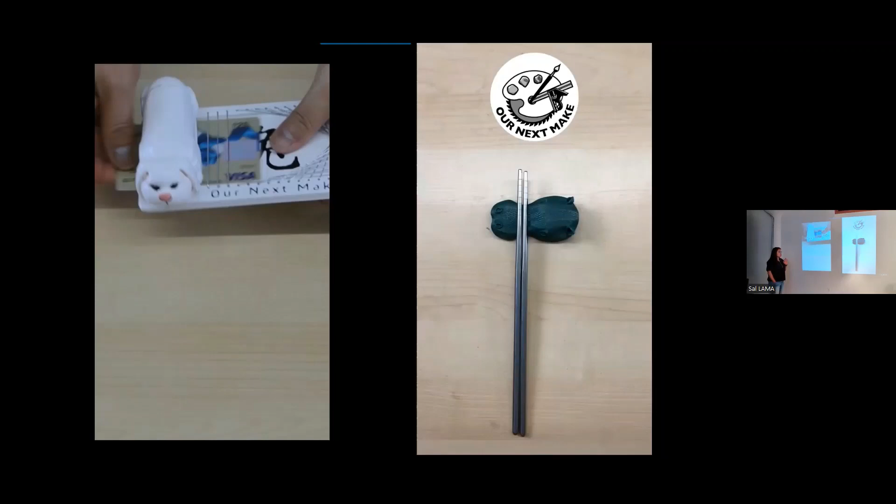The way I went from CAD modeling straight into the product, it turned out to be a really nice chopstick holder, paintbrush holder, whatever you like. This is to illustrate that if you let your creativity go, just like with 3D printing, you can make anything you want. So that was another project we worked on.

The last thing I wanted to talk about, I guess I've become addicted to trying to design things that don't use any supports. It's like a new fun challenge, so I enjoy doing that, but sometimes you also absolutely need it to not have supports.

I wanted to talk to that for a second. I think I have an example here. Can I set the stage while you find the file?

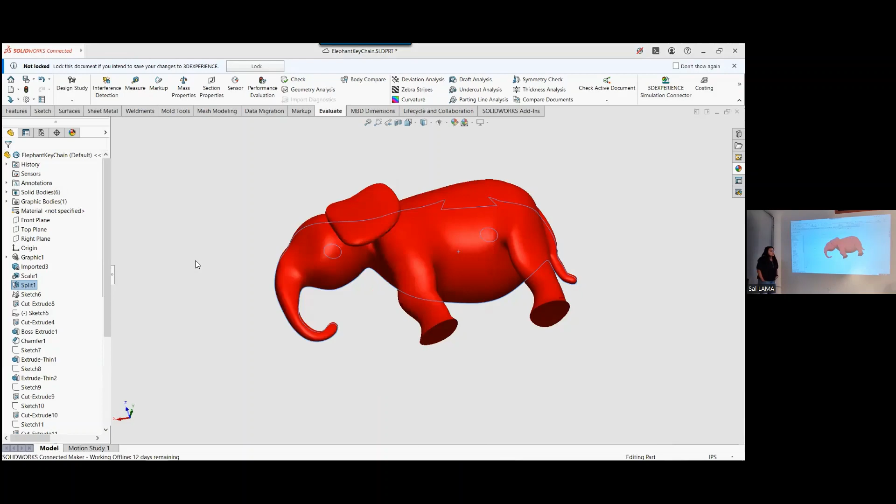So we designed some siphons and caging around the siphon to hold the media back. As Sal pointed out, because there's a snorkel that comes off of it to break the siphon, that's the critical area where you really don't want any support structure, and you don't want to fish in there to remove anything. So you really have to design intelligently to remove that necessity.

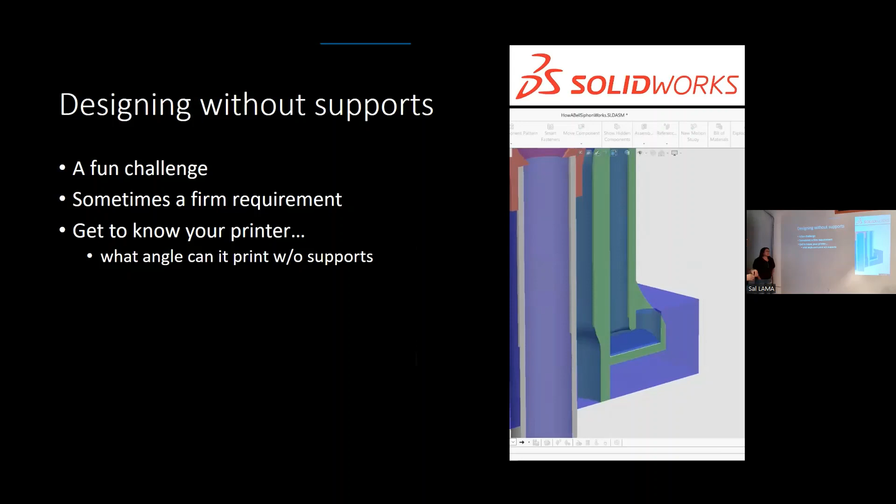Thank you for reminding me about it. Because there's a path of water here, it's impossible for me to extract support material, so I really have to think carefully - except for the water soluble option, but we didn't do that, we don't have that. It's really important to think about whether I'm printing this thing right side up or upside down, and whether I have all my angles right so my printer won't ask for supports.

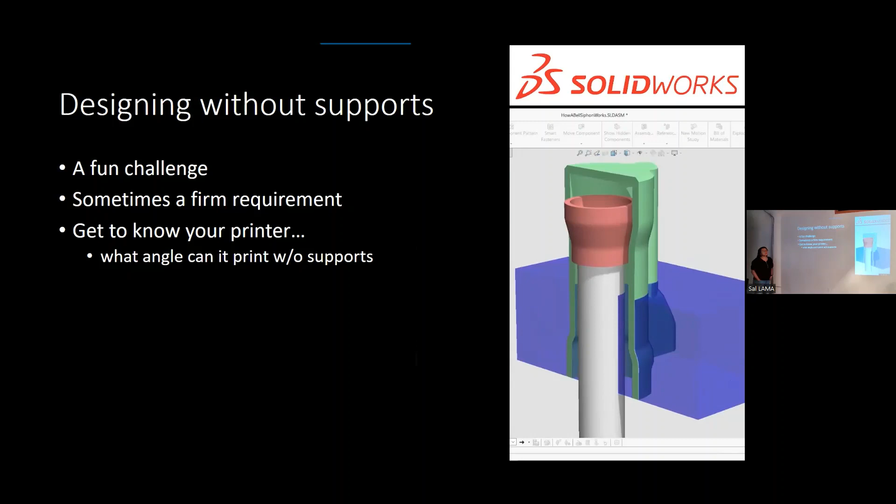Here's another example, a sneak peek of a future episode. We're designing a watering can, and this is the nozzle of the watering can. The path here, although you could argue you can kind of get down there and scratch out some stuff, I want that to be perfectly smooth.

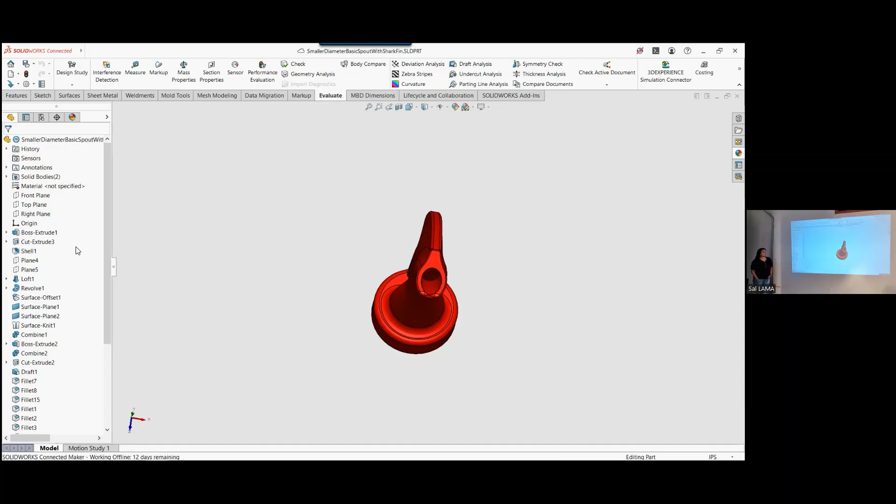So what I do in SolidWorks is start, in this case, with the path - this is the water volume, or at least the path of the water. That's what's important, so I start designing that. Then everything from that will be offsets and other features, and that will be my hollow. When I'm designing that, I keep in mind what I know about my printer and how I'm going to do this.

This is a sweep or a loft, I think it's a loft. Basically I'm starting from one shape, going down a path, and ending up in a circle. This simple sketch lets me control whether or not I hit that range of the angle where I need support.

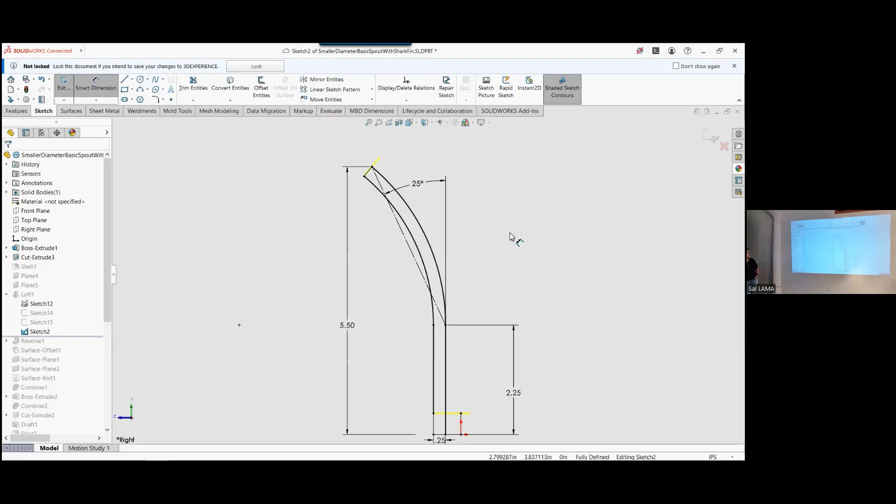This 25 degree is actually not important, it's just some weird angle. What I really want to know is here, I'm going to draw a line that comes off tangent to there. Oh, come on, my zoom control.

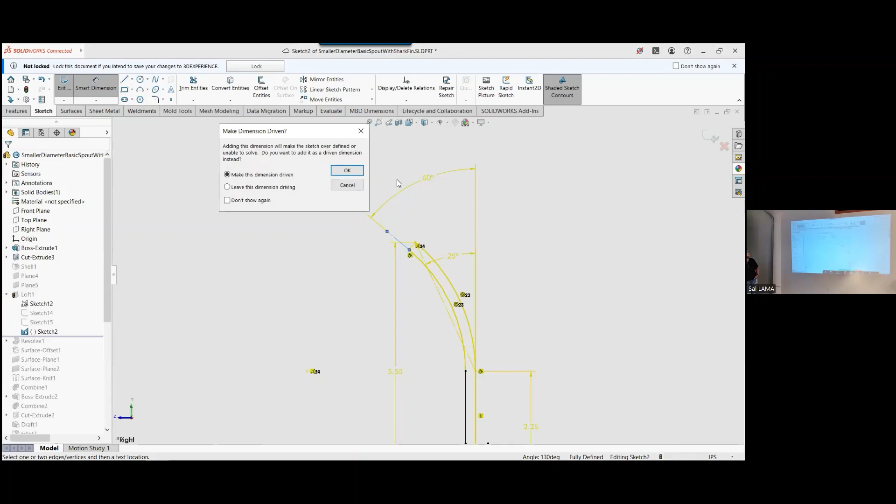What I really care about is the angle right there. We're going to make this a driven dimension, because at the very tip here is where I'm going to have my material, and it's going to be out in the air. If I make that angle too much, depending on your printer, is it 45 degrees? Is it 60 degrees? I don't know, but for your printer you're going to want to stay in that range. Let's say for my printer it's 45 degrees, and I'm going to need support out there.

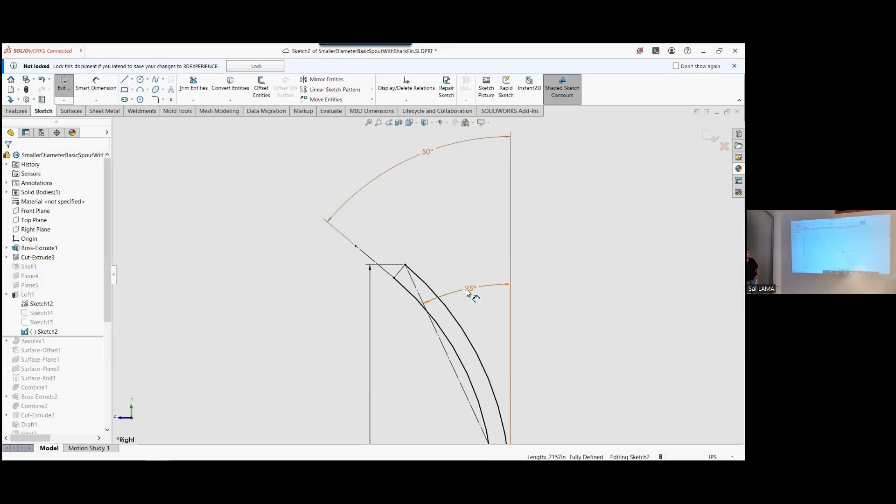In SOLIDWORKS you may be aware you can take certain dimensions and make them driving. Make this one driven, that underdefines my sketch, and turn this one and make it driving. Now I can say I want that to be 45 degrees, and that'll update my sketch. Now I'm in complete control of the path, and of the final result.

So that's just something I wanted to point out, that when you're designing, sometimes it's just fun to figure out if you can design without supports, and sometimes you absolutely need it. Some of the ways we do that is by just paying attention to what's important, it's just like another design criteria or a constraint.

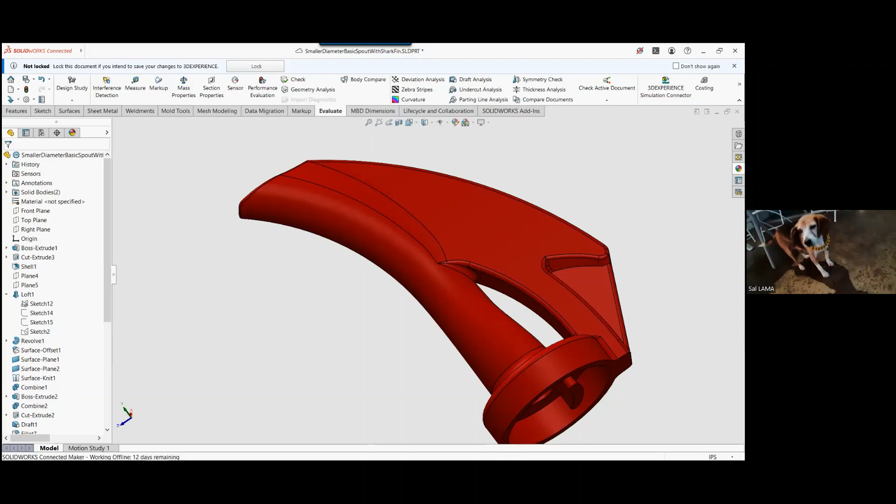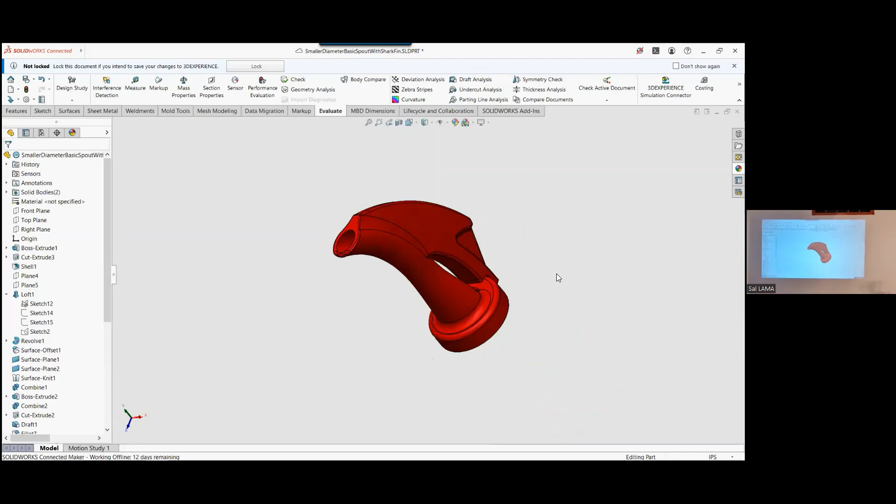So that's what you're missing in New York City tonight, Brooklyn. Yeah, can you read? All right, it's 8 o'clock, you're at the end, we're talking too much, oh Sal. I don't talk too much.